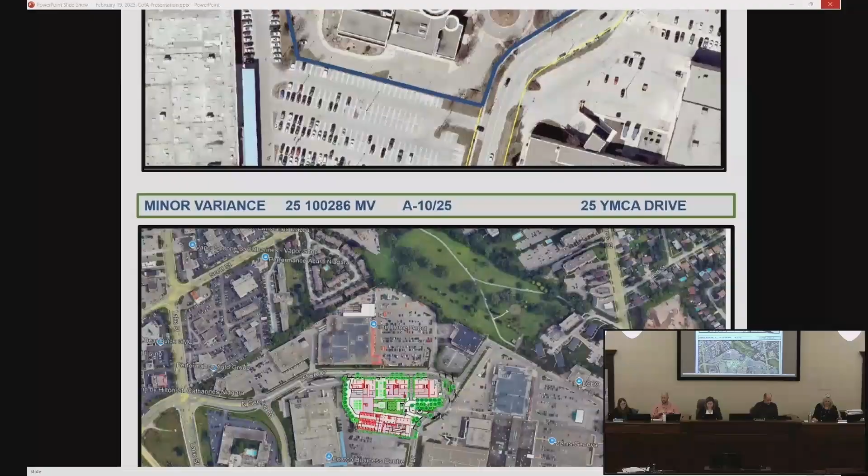This application is for the existing, previous location of the former YMCA building, which has been sold by the YMCA and purchased by a new owner. The new owner is coming to us with respect to a proposal submitted to the city, and that proposal requires some minor variances.

6 variances in particular. So our focus with this committee is these 6 minor variances as they relate to the 4 tests outlined by the Planning Act to determine whether or not we can approve those. We also have a staff report, a technical report, which includes the various departments' comments on the application, and there's a recommendation in that report, which hopefully everyone had a chance to read.

In that report, variance 1 is recommended to be approved with a slight change, outlined in the report. Variances 2, 3, and 4 are proposed by staff to be denied, and variances 5 and 6 are proposed to be approved.

The applicant this evening will have also read this report and will probably be speaking to the staff report with respect to those comments. So at this time, after we hear from the applicant, we will invite anybody in the gallery who wishes to speak to this application to come down. I'll be trying to focus you on these 6 minor variances in particular. The other aspects of this development are beyond our purview. We were given this situation to consider these 6 minor variances.

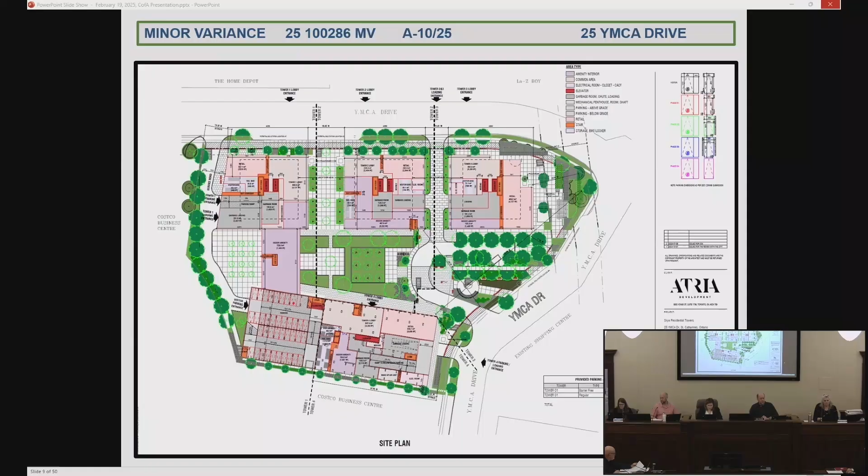So would somebody from the applicant like to say who you guys are and what your comments are regarding the staff report?

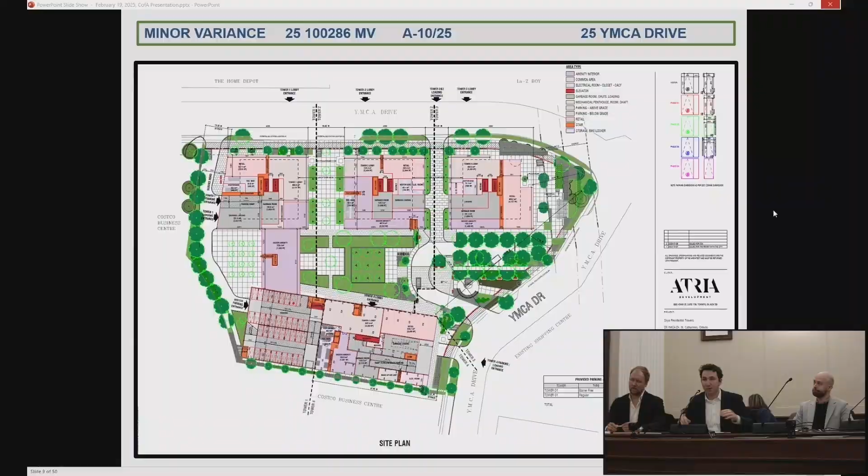Yes, certainly, Mr. Chair, thank you. Good evening, Chair, members of committee, staff, and members of the public who may be in attendance tonight. My name is Ryan Ferrari, I'm a senior planner at A.J. Clarke & Associates. I have my colleague Franz Kloibhofer with me as well, who's a principal planner at A.J. Clarke & Associates. We also have folks from BA Group, Michael and Doug, who are our parking consultants, and you'll hear from them shortly. We also have the owner, VJ, from Atria Developments. So that's our contingent today. We're certainly here to make our case for this application and answer any questions as necessary.

Now, I think the first thing I'd like to note, I provided the committee with a bit of a presentation. I'll just start right on page 2 there.

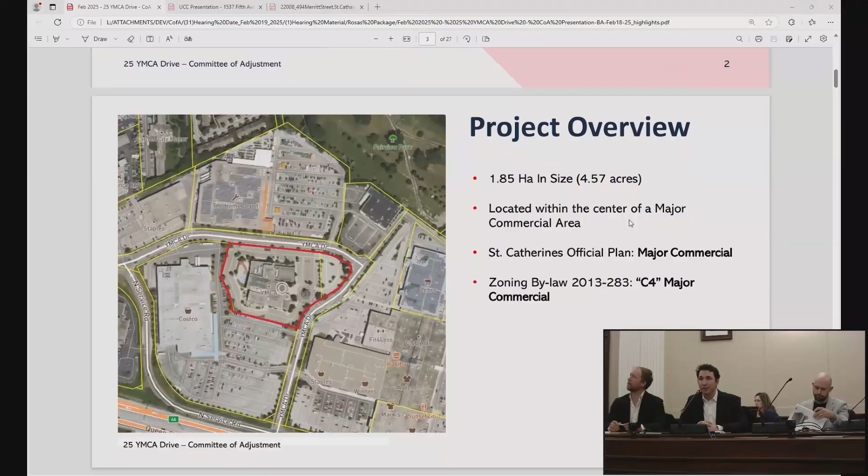Just really quickly, we're going to discuss the proposed variances and staff's recommendations, but first want to touch on the background on slide 3, what's being proposed. This is a 4-tower development located in a major commercial area in the official plan. And as the chair did mention, these 4 towers are permitted in the official plan in terms of height and in terms of the zoning bylaw.

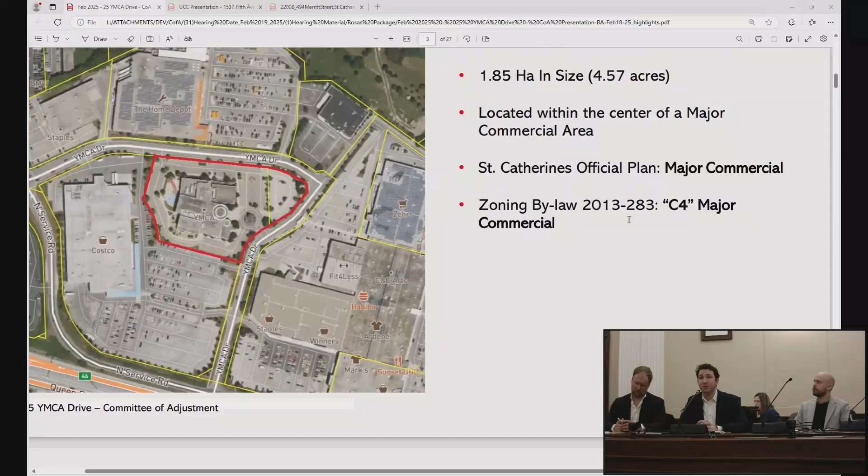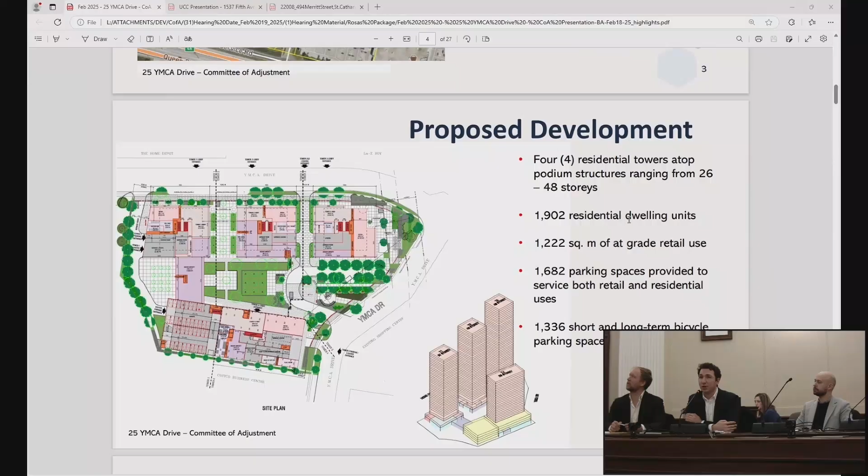These uses are permitted. What we're discussing with the committee today, and what we're asking for, are actually 6 variances, which I put on the next slide, slide number 4. There is ground floor commercial proposed, and 1902 residential units. All this is permitted. In addition, I want to note there's a significant amount of short-term and long-term bicycle parking proposed on this site as well. Next slide, please.

Like I said to the committee, we're requesting 6 variances. Really, what they relate to: 2 relate to bicycle parking and their location, and the other 4 relate to parking in general.

With the next slide, one of the variances we're requesting is for a parking ratio of 0.85 spaces per unit, whereas 1 space is required. The way staff wrote this into their report, which we're in agreement with, is that this will translate into a 0.75 ratio for the residential component and a 0.1 ratio for the visitor component. Staff are supportive of this variance.

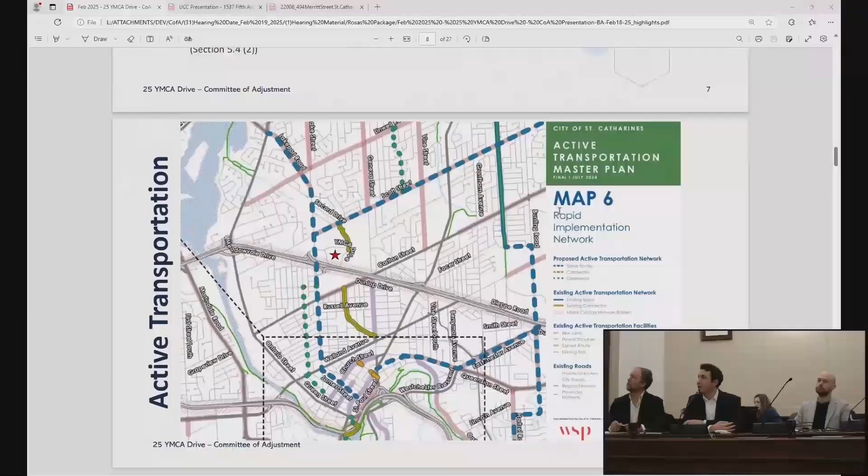Part of the reason why they're supportive, if we go to the next slide, there are policies in the official plan which staff have reviewed in their report, and they concur with our request to reduce the parking for this area because of where it's located. I won't go through the policy details, it's in the staff report, but the next slide shows some of the planned active transportation proposed surrounding the site, showing the cycling network and proposed active transportation network nearby.

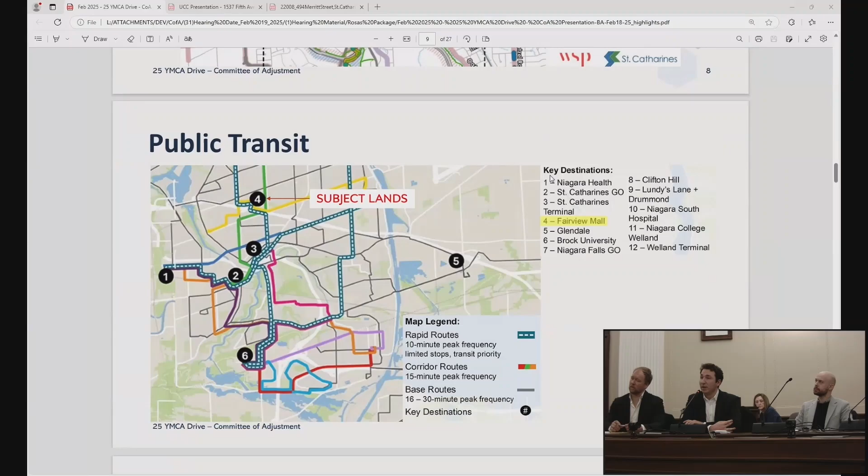The committee should be aware that Niagara Transit is proposing some new plans. What we've highlighted here, number 4, is close to the Fairview Mall site, which is across the street. Those blue and white dotted lines are proposed rapid routes, meaning bus service will be more frequent, every 10 minutes or quicker during rush hour. Adjacent to our site we already have a bus terminal of sorts, and through our site plan application process, we're going to be adding more as well.

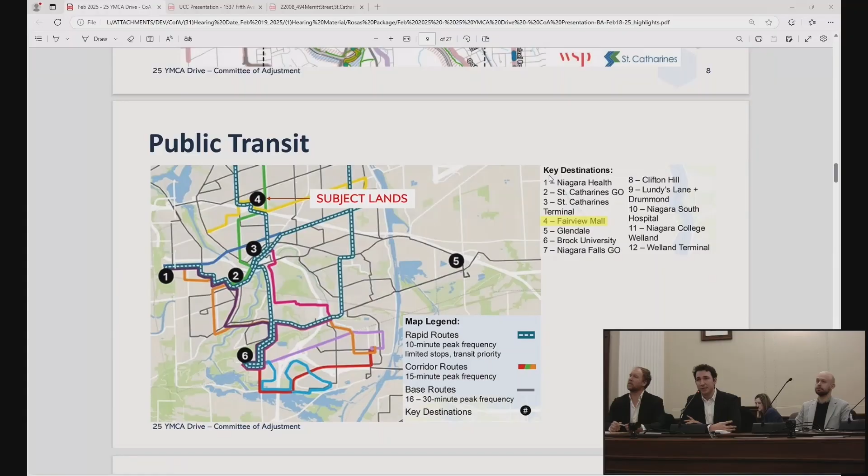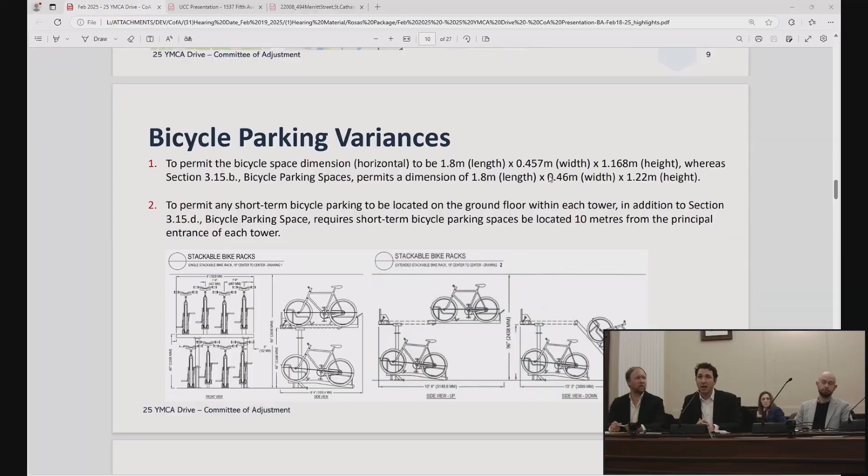So that's the parking variance, and it's the variance that staff support. Really quickly on the next slide, I grouped the bicycle variances together. They just relate to the location of the bicycle parking — we can't locate it all on the ground floor because there are so many spaces. The other relates to the bike parking space, which is an OEM manufacturer type of space, and that's why we need the variance. So those are the variances staff are supportive of, and I'll pass it to Michael and Doug to discuss the parking variances related to our actual parking spaces.

Next slide, please. Hi again, my name is Doug Hall. I'm with BA Group, and we're the parking consultants for the applicant.

I'd like to provide a little background on the request for the parking dimension variances. The original site plan for this site was made in 2021, about 4 years ago. At that time, the parking layout that accompanied that application was based on the then-current zoning bylaw parking requirements, with one exception, having to do with obstructions. The plan dealt with that by creating openings between the columns so that doors weren't obstructed, and I'll talk about that in a minute.

In April of 2024, city staff recommended changes to council to the parking dimensions—3 years after our application had been made—to reduce the width of a drive aisle, increase the width of a parking space, increase the length of a parking space, and bring some criteria to the placement of columns adjacent to parking spaces so they're not obstructed, so people can open their doors.

In the report to council, staff stated that the changes were made in response to formally incorporating a driveway dimension into the zoning bylaw. Previously it had been adjudicated through the site plan process, so they wanted to bring it into the bylaw so it could be adjudicated that way. At the same time, they addressed requests from developers to reduce the width of the drive aisle in order to reduce structural spans, and to compensate for that, they increased the width and length of the parking space.

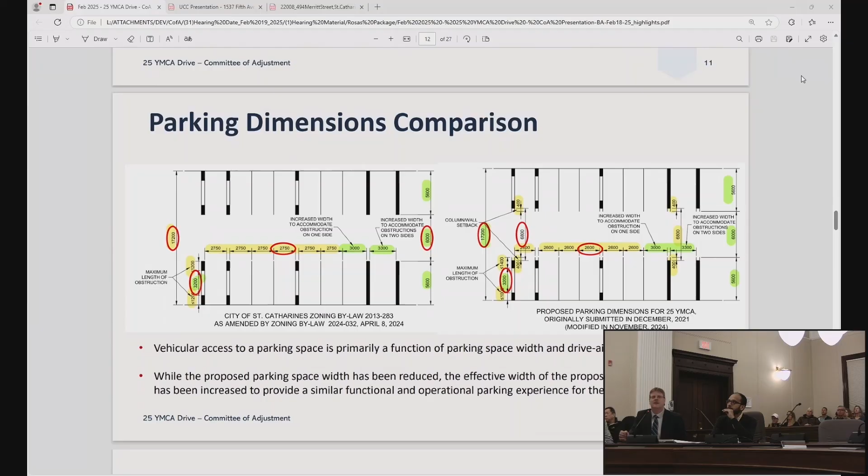Can I go to the next slide, please? Oh boy, that's going to be hard for a lot of people to see. I hope you can see that on your screen. Oh, thanks. This slide shows a comparison of the current zoning bylaw condition on the left and the proposed condition on the right, with the same parking layout.

It's hard to tell green and yellow on that slide, but the key differences are the width of the drive aisle, which is 6 meters in the current zoning bylaw condition. We've increased it to 6.8. The ability for a car to park in a parking space is determined primarily by a couple of things: the width of the drive aisle that the vehicle is turning from, and the width of the parking space that the vehicle is driving into or backing into. They work together—drive aisle width and parking space width work together.

So the current zoning bylaw condition has a narrower drive aisle and a wider parking space. We're proposing a wider drive aisle with the previous parking space width of 2.6 meters—so from 2.75 to 2.6—but the drive aisle goes from 6 meters to 6.8 because we're able to push the columns back. The architects have confirmed that the structural issues are not a problem in this case with making that span work. So effectively we've created a parking situation that is, in our opinion, equivalent.

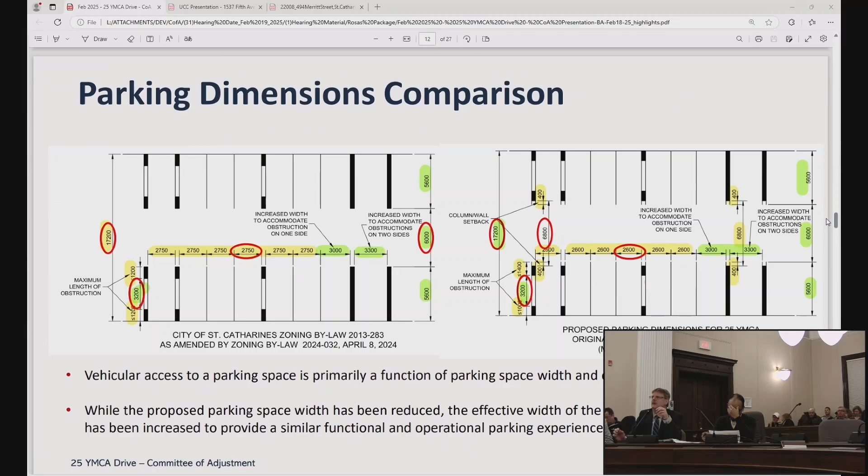One key component that's the same in both conditions is the width between the front column, adjacent to the drive aisle, and the column adjacent to the back of the stall. That opening of 3.2 meters is exactly the same in the zoning bylaw requirement and in our proposed requirement. We want it to be the same because we want people to be able to open their doors, obviously. Next slide, please.

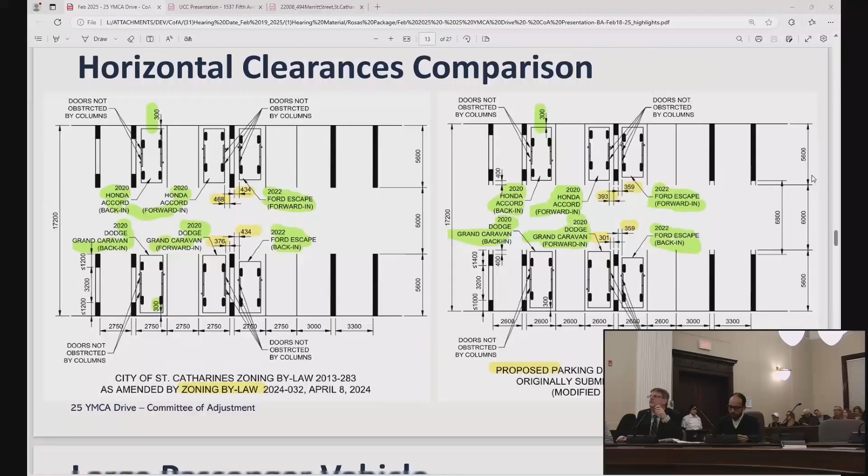The next series of diagrams are what we call vehicle maneuver diagrams. They are computer simulations of the turning movements of a vehicle, but based on field surveys we do. We actually take these vehicles out, turn them around, measure their turning diameters and turning radii, and then create these simulated diagrams, really just for comparison purposes.

We're always going with the bigger vehicle, the Dodge Caravan, in these diagrams. In the one on the left, the zoning bylaw parking requirements, the vehicle driving in makes a correction: it turns towards the parking space, backs up, and then drives in. Same thing in the proposed condition, so the effect of the driving condition is the same for the driver.

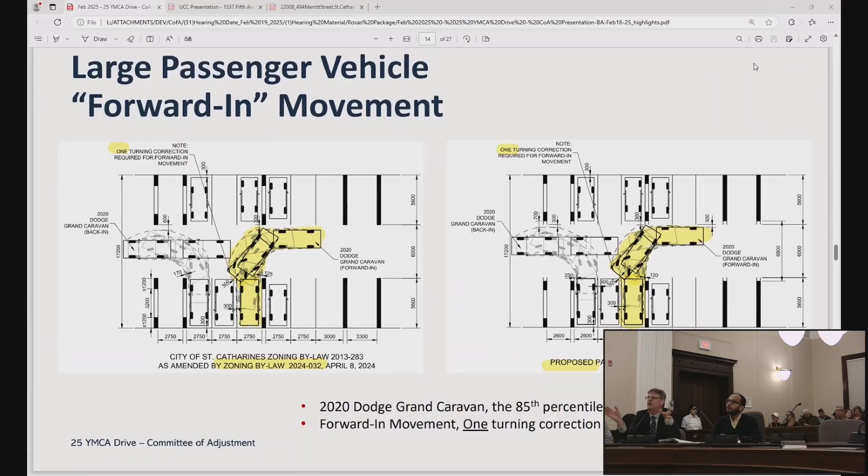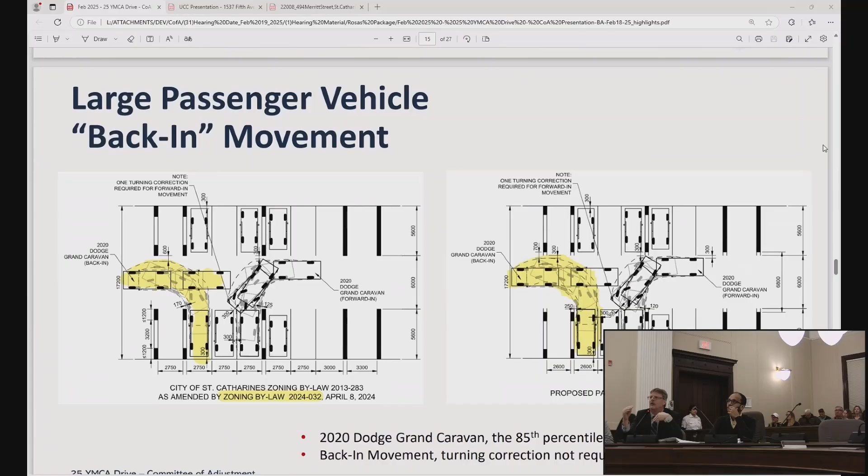This is the same vehicle, but it's backing in now. Many people find that if you drive a larger vehicle, you'll often see people back into their parking space because it's easier to do. Most of the maneuvering area, the swing, is out in the drive aisle where you've got lots of room, and you're backing in straight into the parking space, which is narrower. The condition in the zoning bylaw and the proposed condition is exactly the same in terms of the driver's ability to make that turn. In fact, it might be a little easier in the proposed condition because we've set the columns back from the edge of the drive aisle, so there's less obstruction for the vehicle while it's turning.

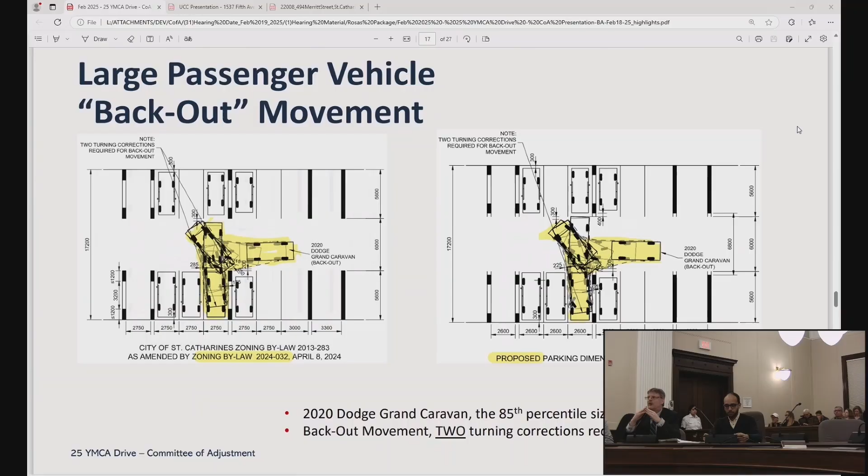Looking at plans with vehicles on them is fun, but real life is always interesting too. So the next few slides are shots of vehicles parked in a real underground parking garage with the same parking dimensions that we're proposing.

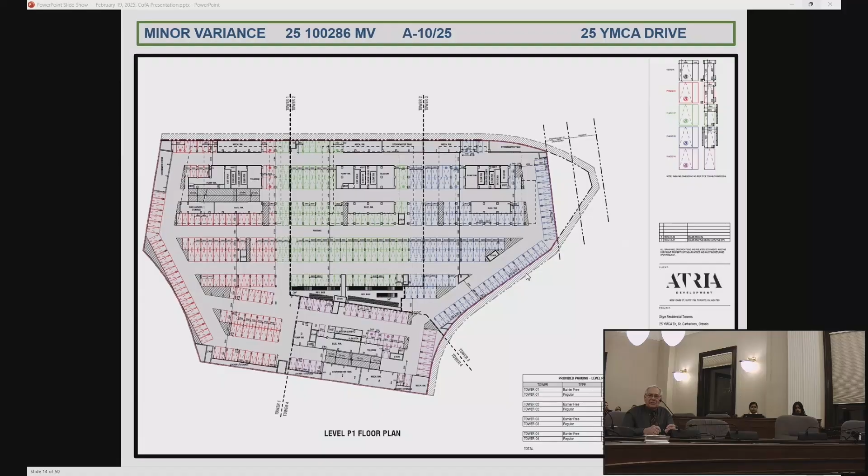We've got the shipyards, and I'm familiar with that, we've got friends that live there and everything else. But now we've got to be very careful of the type of batteries that are in these new vehicles, and they're underground. The garage isn't high enough for fire engines, and you have to have special spray to put the fires out and all that.

Again, I'm sorry, I'm going to have to interrupt you because the life safety of any building—I'm an architect, I have to deal with this. The life safety requirements for the design team to provide adequate fire suppression and life safety measures come at the building department, building permit application phase. This is simply, we don't care if it's made of Swiss cheese at this point, we just care about how the residents feel about the parking reduction and bicycles, although no one seems to care about poor old bicycles.

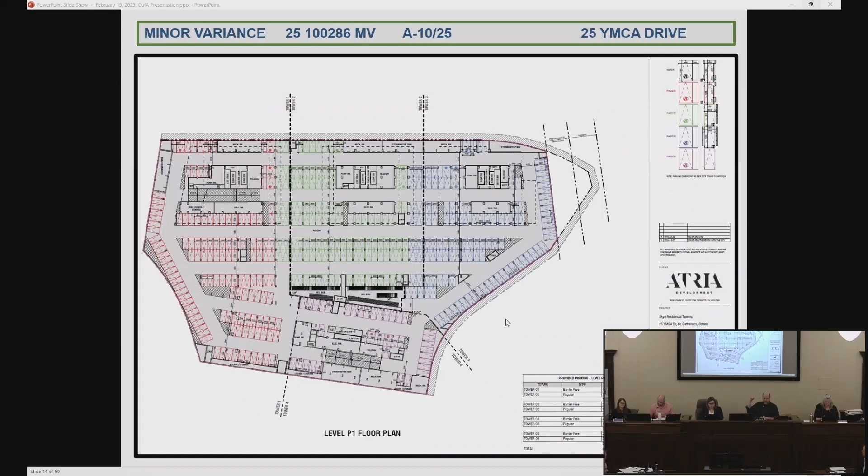And the applicant's going to be bothered by the fact that the city wants to recommend denial for their parking stall reductions, which is why they spent so long trying to prove to us through those turning radii diagrams—which did not include an F-150, just showed it in the picture—that they should be entitled to approval of what the city is denying. So right now, nobody is happy with the staff report in terms of not getting what they want. So the safety of the parking garage is someone else's concern at a later date. It is not a concern for this minor variance application.

Mr. Chair, I would like to be very clear on that point. Sir, I'll be very clear: we will meet all requirements of the provisions for firefighting in the building code. We will be held to that task by the city.

Okay, and then the other thing is, our city isn't Toronto—we don't have a lot of high buildings. Respectfully, you've got... you're in Ontario. Right, and you are subject to the Ontario building code.

In terms of St. Catharines, we have Towering Heights Boulevard off of Glendale Avenue, where there are a number of what we might consider mid-rise or tall buildings in St. Catharines. But there's a way to accommodate this building type, and St. Catharines is looking at ways to increase intensification and density as per the Planning Act. This is a vehicle through which to do it—to stack people on top of one another rather than spread out and extend our resources to the brink.

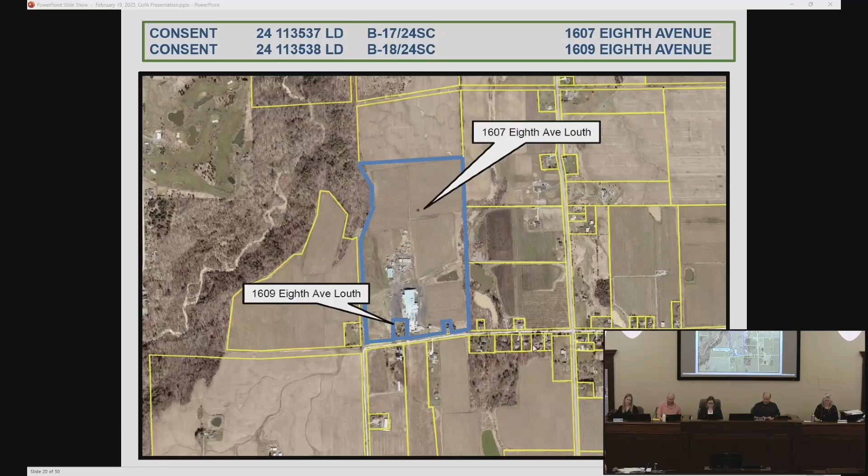However, I'll do a better job in this application, because we are now going to go to our second application at 1607 8th Avenue Louth for 2 consent applications. This is to divide up some agricultural rural property, and I would invite the applicant to state their name and address and offer anything they want in support of their application.

Yeah, it's the one, it's the little red light. Red one? Okay. My name's Tim Kenny, 14 McCartney Court, Thorold, Ontario.

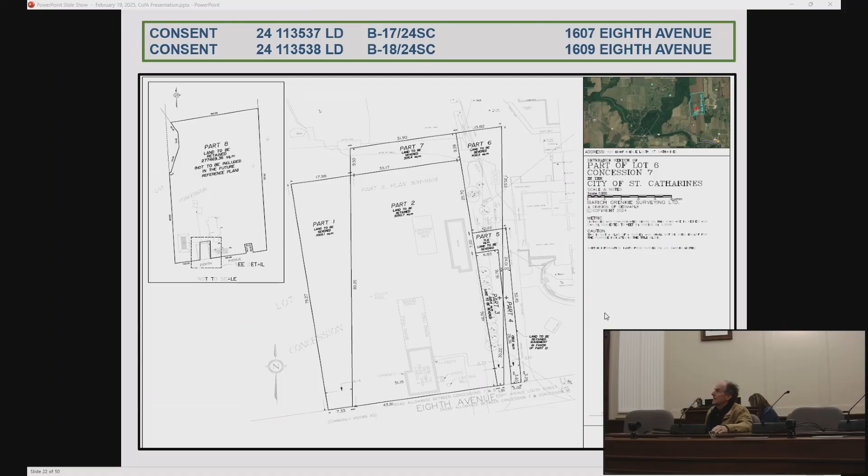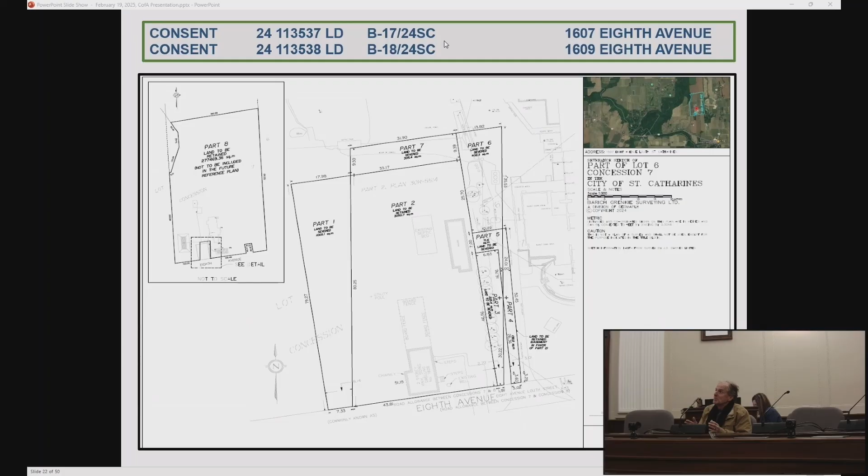I'm here representing both Hernder Estates Winery and my brother John Kenny, who lives at 1609 8th Avenue. I'll keep it brief. We agree with staff's recommendation. It's really not a severance of a piece of farmland, it's more of a lot line adjustment. We all know Hernder Estates Winery had an awful fire that destroyed their operation. When they went to rebuild, they found some existing services were encroaching onto my brother's land at 1609 8th Avenue. So what we've attempted to do is a lot line adjustment, swapping an equal amount of land to accommodate the existing services at Hernder Estates. As a result, some of their services will be on their own land as opposed to encroaching on my brother's property. Okay, thanks so much.

Any questions from the members of the committee? Is there anybody in the gallery who wishes to speak to this application for severances or lot line adjustment at 1607 8th Avenue, Louth? Nope, great. Would a member of the committee like to make a motion, please?

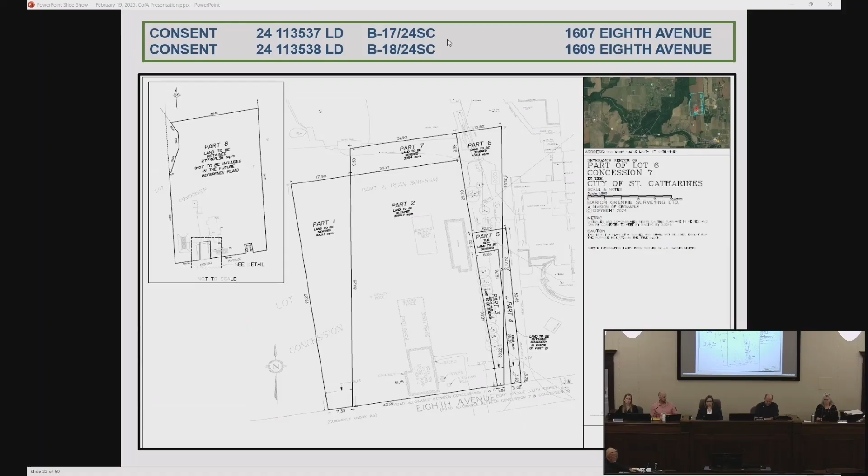Sure. Following consideration of all written and oral presentations, I move that consent applications B1724SC and B1824SC as presented in the notice of hearing be approved, subject to the conditions outlined in the technical report, as the consents are desirable and compatible with the surrounding area, have no adverse impacts on the surrounding properties, have regard to the provisions of Section 51(24) of the Planning Act, conform with the policies of the city's official plan, and with the conditions fulfilled also comply with the zoning bylaw. They maintain the intent and purpose of the provincial planning statement, and they do not conflict with any applicable provincial plans. Thank you.

All those in favor of the motion? Congratulations, your application has been approved unanimously. Thank you, Mr. Chairman, members.

Now we are going to move over to 1537 5th Avenue, Louth, for a consent application. Yeah, right.

If we can have your particulars, name, address, and comments in support of your application or anything you may have read in the staff report. Sure, thank you, Mr. Chair. I do have a presentation.

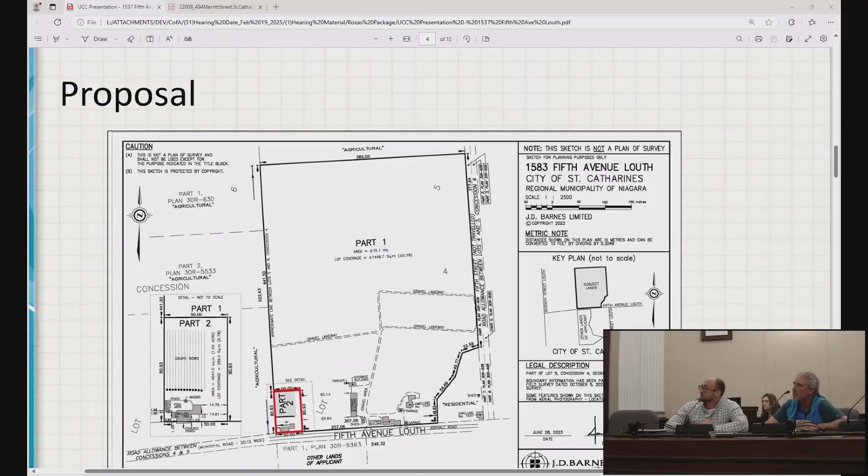So now I want to take a step back and explore what a surplus severance actually is. A surplus severance is defined in the provincial planning statement as one existing habitable detached dwelling, including any associated additional residential units, that are rendered surplus as a result of farm consolidation, the acquisition of additional farm parcels to be operated as one farm operation.

Surplus severances are a unique policy tool because in most cases, provincial policy discourages lot creation or any form of land fragmentation in agricultural areas. However, surplus severances are permitted because they remove barriers to farm consolidation, which supports the agricultural sector by creating larger, and therefore more economically viable, farms.

So why is this important? Additional dwellings can be a financial and maintenance burden for farmers, making consolidation more difficult. By allowing surplus dwellings to be severed, farmers can avoid the cost of purchasing and maintaining unnecessary homes. This frees up capital to invest directly into the farm and prevents farmers from having to take on the added responsibility of being landlords, allowing them to focus on farming instead of managing residential properties.

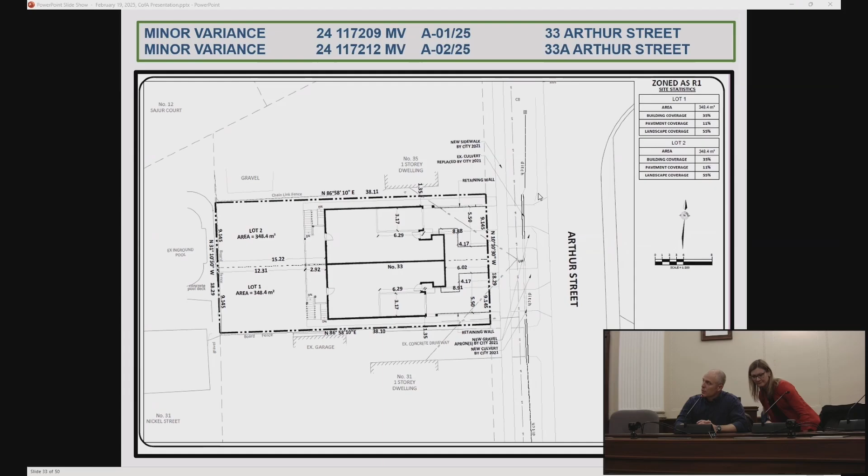So if the applicant could clarify anything they wanted to with their application, give us your name and address, please. Thank you, Mr. Chair. My name is Mark Eitzen. I reside at 6 Crown Street in the North End. This is my wife, Wendy, and we're co-applicants with Mr. Ben Lockyer. He owns the right side of the building, which is 33A.

So we're here to discuss, regrettably, the parking issue that's already been before the committee today, just in a slightly different light. The parking issue is becoming a bigger challenge for the city all the time, and it's not visible in the picture, but we have a legal auxiliary dwelling unit in the basement of both 33 and 33A Arthur. So we've invested significant time, effort, and resources into building a legal dwelling within the city that's in compliance with all the current building codes.

And we're also local residents, we're homeowners, we live 5 minutes away from our investment property. So we disagree with the staff report in the sense that we believe that our request is in fact minor in nature. At the time that we built these properties and completed the driveways pre-April 2024, the zoning amendment at that time allowed for a driveway width of 50% of the front lot, equaling 4.6 meters. We're asking for 5.5 now.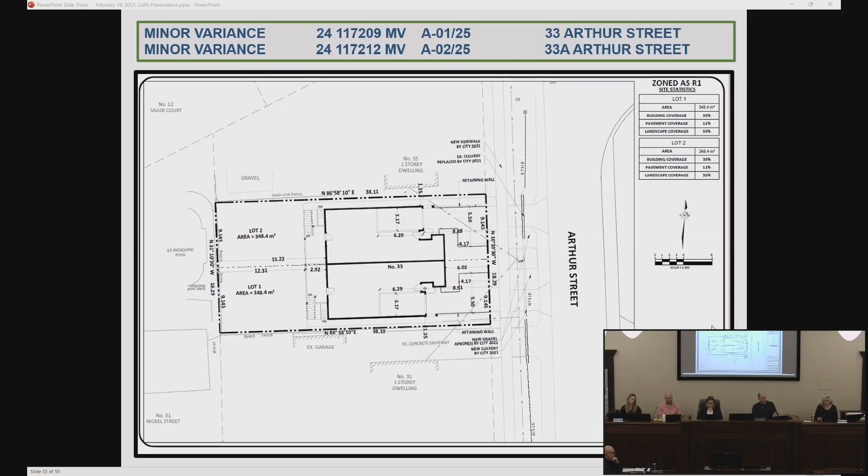In a sense, you're correct. We're not denying at all that we are in violation of the bylaw. I didn't get into the entire background, but there are issues with the original plan and the house being built in the wrong spot geographically on the land. It was actually supposed to be set further back, so parking would have been an easier issue. There are probably records within the city of that having been adjusted, and I believe there was an amendment made at that time. Ultimately, we were just trying to mitigate the circumstances of tenants having to cross the street. But I recognize, I don't dispute your point.

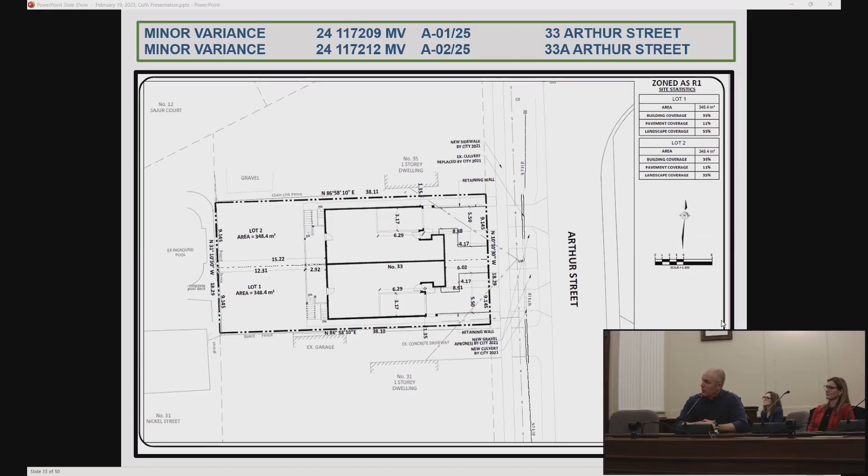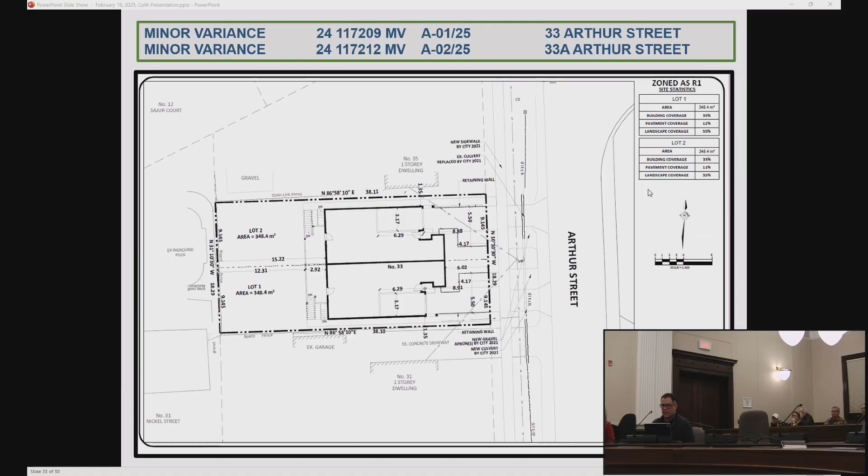As a local real estate professional, I have the privilege of being in these types of properties on a daily basis. Today I've been in 6 properties, and 2 of them had basement units, because over my involvement over the last 15 years, the growing trend has been to add these accessory dwelling units. It's rare to go on one of these tours now and not go into a basement that has an additional kitchen with people living in it. But I can only count on one hand the number of times these properties, even though I'm in them daily, have been done legally or have the permit in order to do so.

As a partner with the city who has now built 3 of these, we do want to be part of the housing solution and not part of the problem. But your practical consideration is requested. We know there are now financial incentives to grant and create what we've done on our own, highlighting the desperate need for additional housing and pushing that. Things are changing, except with regards to the parking. Our request to the committee is to consider this both from a practical perspective, but also, as Mark laid out, from a safety perspective as well.

How can we grant permission to these additional dwelling units while not considering the need for tenants to actually park side by side? The front-back parking solutions with a garage and an adjacent parking do not meet the needs of any living conditions when you build these accessory dwelling units. People will not be knocking on doors to their tenant upstairs to ask them to move their car so they can get out of the driveway they've been parking on. It's just not practical, even from an interpersonal perspective. We believe the common sense approach, if we're going to make concessions for accessory dwelling units, needs to consider this additional parking as well.

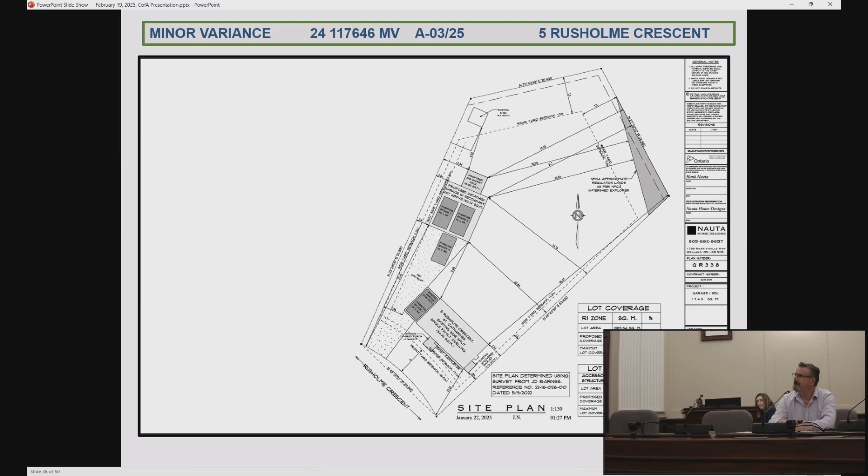All those in favor? Great, your application's been approved unanimously. With the, here we go. Your applications for variances 1 and 2 have been approved, 3 has been removed. Thank you. Thank you, Mr. Chair.

Okay, so let's keep the momentum going here and find ourselves at 29 Johnston Street.

Okay, so welcome. We have a consent and minor variance application. This is to facilitate construction of a proposed 2-story detached dwelling. So we have the staff report, which has a number of conditions related to the consent, 11 in total, and staff recommendation for approval of the minor variance.

So you can state your name and address and share with us your thoughts on your application. Appreciate it. Good evening, Mr. Chair, and all members of the committee. First of all, thank you for all the recommendations, we just have some comments on it. I'm representing 29 Johnston Street on behalf of the client. We've been working on the design of their house for a while, and that becomes, as you mentioned, the consent.

A couple of minor variances for part 1 of the lot. Basically, we only have a couple of concerns regarding points number 4, 5 and 6, which require the construction of a 1.5 meter sidewalk on the property along Johnston Street. We noticed that on the same street, Johnston and Bayview, there's a severed lot already, and it doesn't have this condition, being also an existing corner house. We just wonder if we can move that fee until the project is actually going to be built.

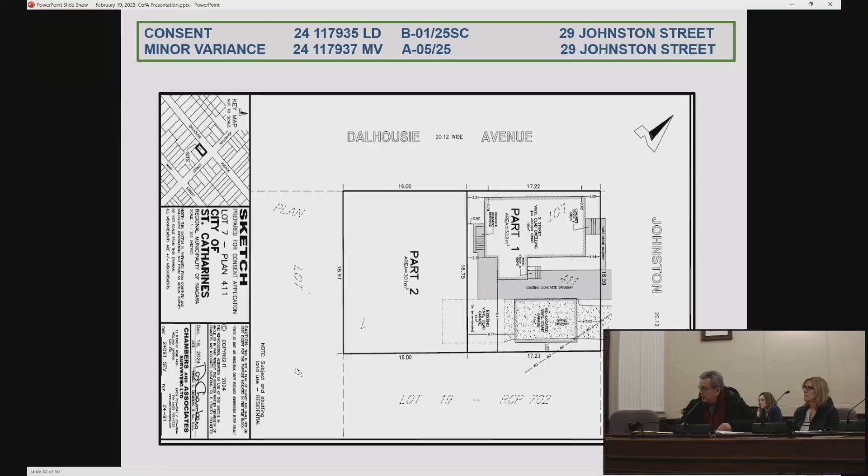The second point we want to request a waiver on is the requirement for the stormwater management report. As this is an existing condition, it's already draining to Johnston Street, and we can provide all the calculations the planner is requesting to make sure it's under the 45%, so we don't have to go through that hassle being an existing house that's already draining properly into the street.

So again, this is one of these things of measuring - does staff have a comment regarding the applicant contesting condition number 5?

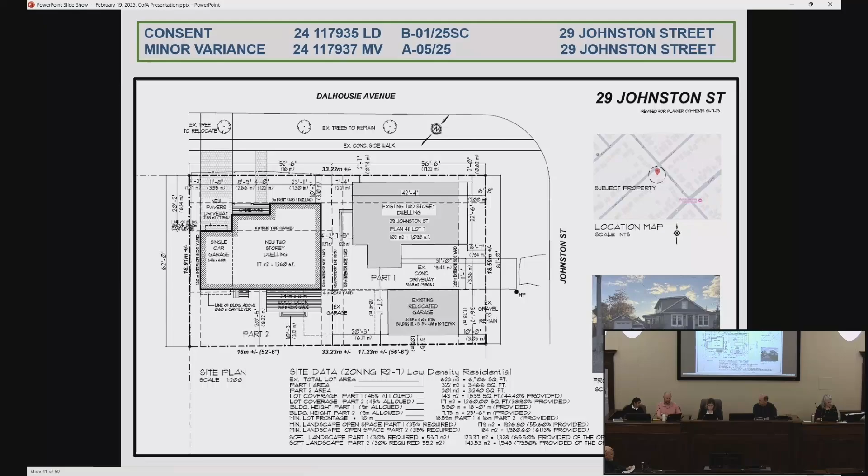Through the chair, to the applicant: regarding the requirement for the stormwater management report, this is a requirement from the development engineer to confirm that the new lot creation would be adhering to the stormwater drain and drainage accommodations for the new lot created through the consent. So this is again a standard requirement for lot creation for consent applications.

Basically, they want documentation that can demonstrate that surface drainage flows are not going onto other properties or even onto the severed property. So this is an attempt at documenting what's actually happening on the site and confirming there's no adverse effects on either of the adjacent lots.

There's a comment anyway. We will consider your request in our motion to remove these, but I'm just providing you with reasons and explanations as to why they're there. So, your next comment? Thank you, Mr. Chair.

And the last one would be regarding number 6, about the servicing and grading for the existing lot. As pointed out, the above is required when the setback variances involve a building or construction being less than 0.61. As we can compare with the survey, it says 0.62. So we understand we have to provide it for the new dwelling, but for the existing one, probably we can also have a waiver.

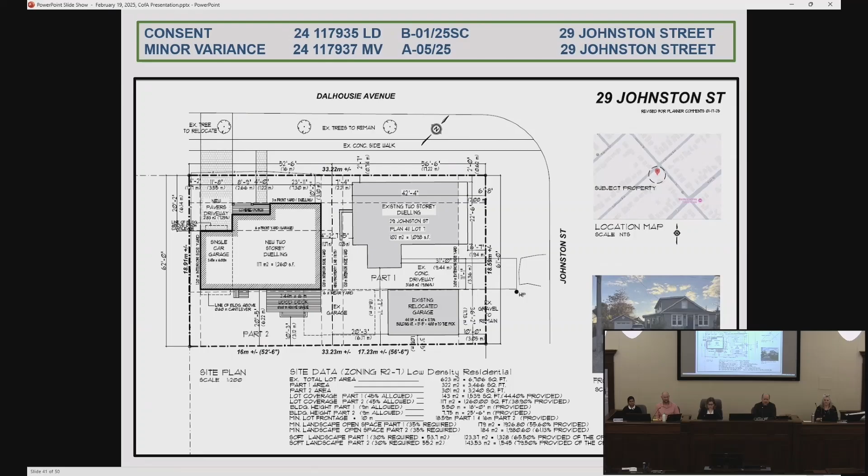Hi, my name's Mark Rainin. I live at 31 Johnston Street, just across the corner. I also work in the building industry, so I think the intensification of this property is ideal, and obviously it meets the requirements. A couple things as I read through the multiple pages on the property.

Item 4, the sidewalk - I've lived on that property for 21 years, so there is no sidewalk from Johnston to Bayview. You could say there's a sidewalk on a portion of Main Street to Dalhousie, however there's a vacant property that's basically overgrown. The rest of the sidewalk is maybe a meter - it's the original sidewalk.

$7,000, I think, was the number for that piece of sidewalk. Realistically, you're going to ask people to do that when the sidewalk is never going to be completed on the rest of the street.

But you understand that there is an attempt to provide a walkable, safe environment in these communities. There is a sidewalk on the other side of the street, correct? Right, and usually we see them on both sides of the street to the benefit of everybody living on each side. Anyway, that was the rationale given to the applicant.

So we have a declared conflict of interest for one of our committee members, so you have two of us to talk to, which is, yes, we can. If it's 50-50, it gets ugly, but we'll see what happens. All right, thank you, Carrie.

This is a minor variance application for 494 Merritt Street. This is for a proposed 4-story mixed-use building consisting of commercial units and 12 residential units. So if the applicant would like to tell us more about what's going on, we'd be happy to hear, and who you are and where you're from.

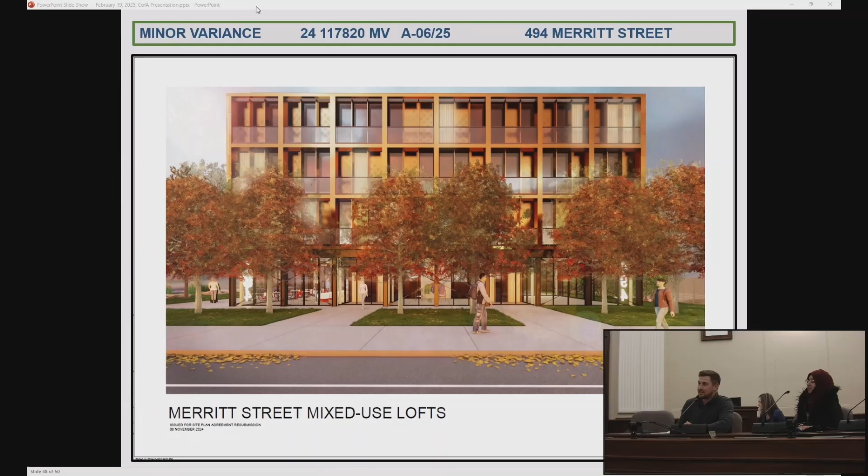Hello, Matthew Trindota from Quartek Group. Quartek Group is here in St. Catharines, and I also reside here in St. Catharines. I'm also an architect from Quartek Group who will be speaking to the file, accompanied by my colleague Zabima, who is a junior planner.

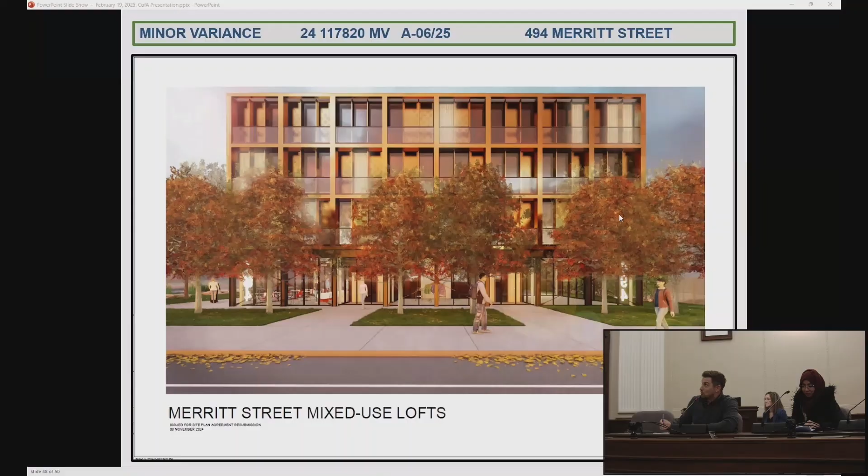We prepared a brief slideshow just to go over the application. We have already submitted for a site plan agreement and received conditional approval, and we're seeking 3 minor variances on 3 small items that we require to get the approval.

The property is located at 494 Merritt Street. We can move to the next slide.

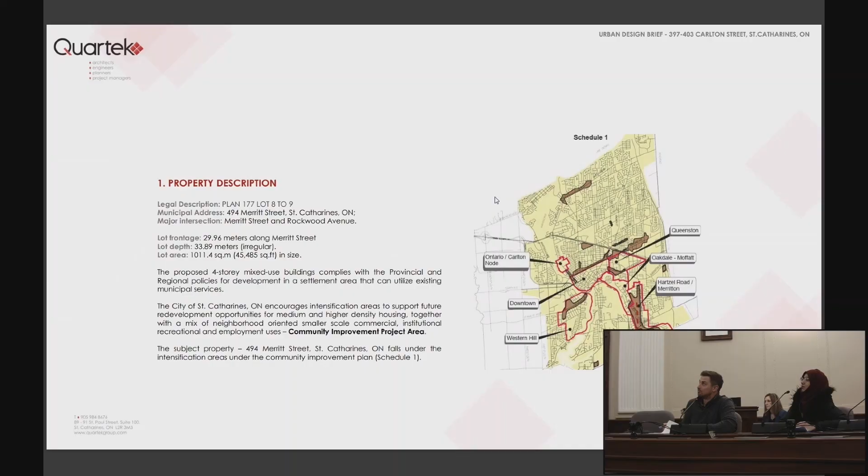The site plan proposal is for 12 residential units. Each of the residential units is a 2-bedroom suite. On the main floor, there are 3 commercial suites with parking in the back. The commercial suites front onto Merritt Street, and there is some landscaping in front of the development, which is included in the development and paid for by the developer.

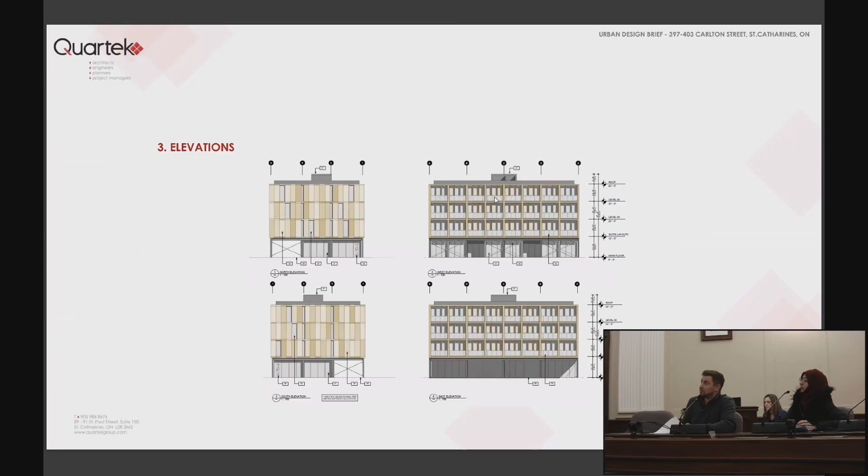Next slide, please. These are the elevations of the building from the front and from the side. Next slide, please. And 3D perspectives.

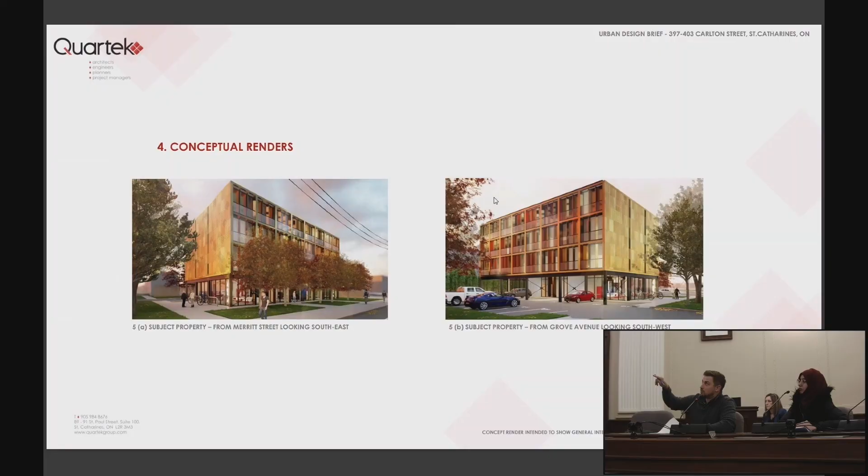The perspective on the left side shows the view from Merritt Street of the commercial space and the little parkette at the corner there. The rendering on the right side shows how the parking area is tucked in behind the building, out of sight from Merritt Street. Some of the parking stalls are tucked underneath the building to help meet the parking requirements. Next slide, please.

We're asking for 3 minor variances. The first minor variance is in regards to the density. There was a road widening which took some lands away from the property, so the density used to comply at 12 residential units, and now it's non-compliant because only 11 residential units are permitted. So we're requesting a minor variance to change the density per hectare to get that 12th unit back, which mathematically was subtracted from us due to the smaller lot area after the road widening.

I noticed that staff made a recommendation to amend what we've been asking for. We've been asking for 118 units per hectare, whereas staff amended it to 119 units per hectare, and that's just from a rounding error, so we do appreciate 119 units per hectare is the correct way forward, and that's what we're requesting.

The second variance that we're asking for is a reduction of 1 parking stall total. That's not for the residential suites, that's being subtracted from the commercial suites. We're required to have 1 parking stall per 20 square meters of commercial space, and we're requesting that be relaxed to 1 parking stall per 22.5 square meters. Not a big ask, it's all a numbers game. So the net is one parking stall that we're asking to be relaxed.

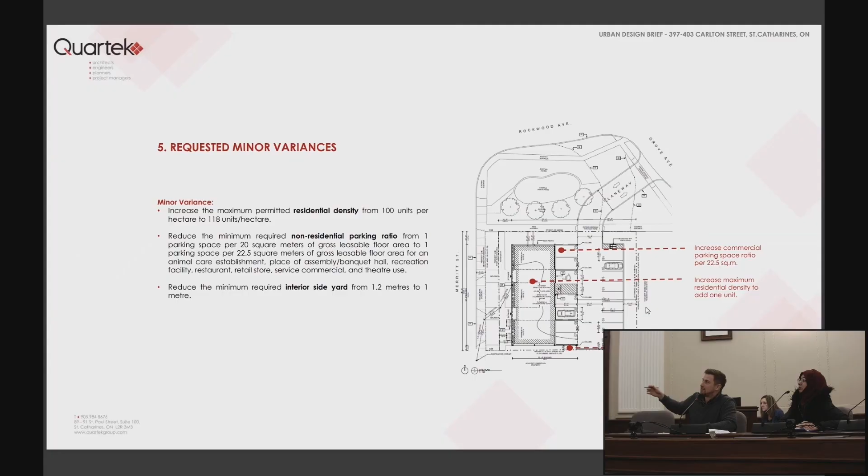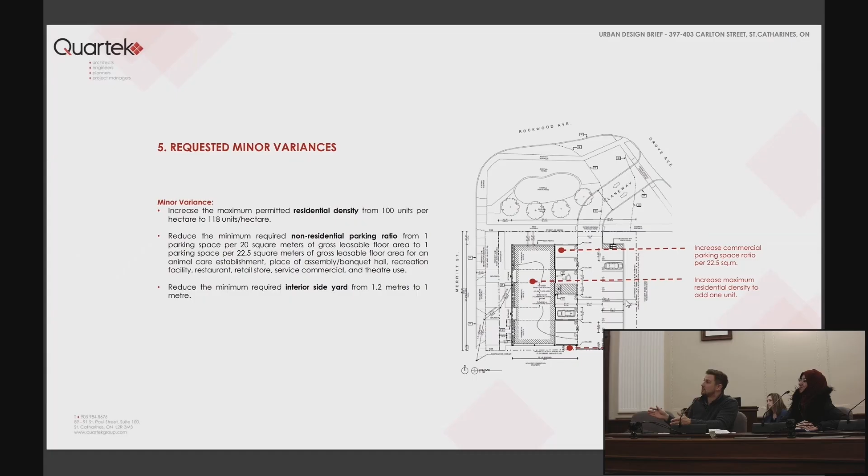So you just couldn't find those 20 centimeters? Well, it's a numbers game, and it has to do with the parking. To get all the required widths between the columns, we couldn't actually.

With that being said, I'll turn it over to city staff and the Committee of Adjustment if they have any questions.

Great, thanks so much. Do you have any questions? I don't have any questions. Does anybody out there have any questions? Because why would you be here otherwise? Well, you know, you drew the last file.

Okay, so name, address, and comments regarding this application with respect to the 3 minor variances being requested. Nina Davidson is my name, and I live at 23 Balsam, the property directly behind this one.

My main concern is the parking. I see that you've got 15 parking spaces and 1 handicap spot, but with 3 commercial units going in downstairs, where's everybody else going to park? Our neighborhood is completely congested with street parking already as it is.

So you're right, they are here for a 1 parking stall reduction, and they have allocated, specifically that reduction is coming from the requirement for the commercial parking requirements. So perhaps if there's a clever answer from the applicant as to what other options are for people who might be visiting this building in the future for its commercial offerings, you're welcome to provide an answer. Otherwise, we can hear out the rest of the comments.

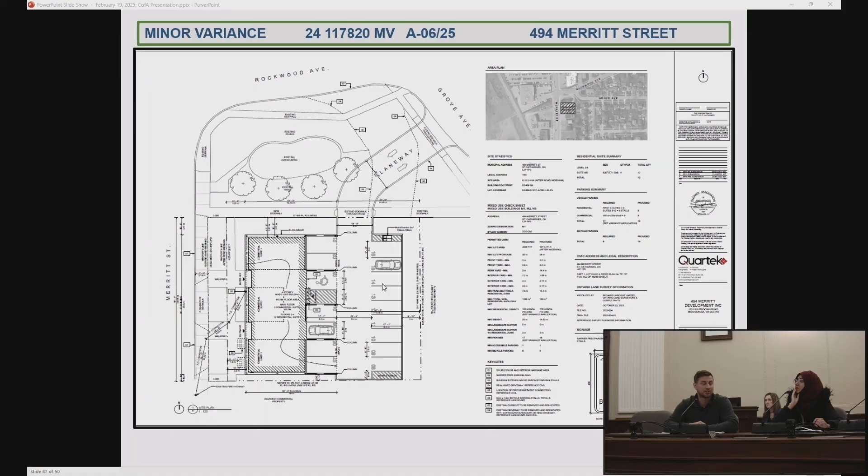The city had requested that we realign it to make that intersection more safe. So in working with city staff, this was an agreed upon preferred solution? That is correct. As a resident who observes this corner all the time, you might have a different 24-hour observation about what safety is, but...

Since you weren't available to consult at the time of the design, the applicant and the city had the city as their best resource, so hopefully the expectations of this improving situation pan out. But you did point out an issue that was reviewed during the design process, and this is the best they came up with.

Well, I wish they'd come up with something a whole lot better. Safety is my concern. I've driven three and a half decades with CAA, so... What's it with you and decades? I like decades, I think. We should still measure our age in weeks, like little babies.

So you're concerned about the driveway access to Grove because there's a pinch point, a convergence of roads. Is there anything else about this application that you have concerns about?

Just reiterating Nina's point about parking. There are two cars—well, right now a guy from the USA parks basically in our area, and I've warned him to be careful because the garbage trucks only come around that corner on Wednesdays and they've narrowly clipped his car. A lot of times cars park in front of my house and across the street too, and people trying to get through there do it very quickly.

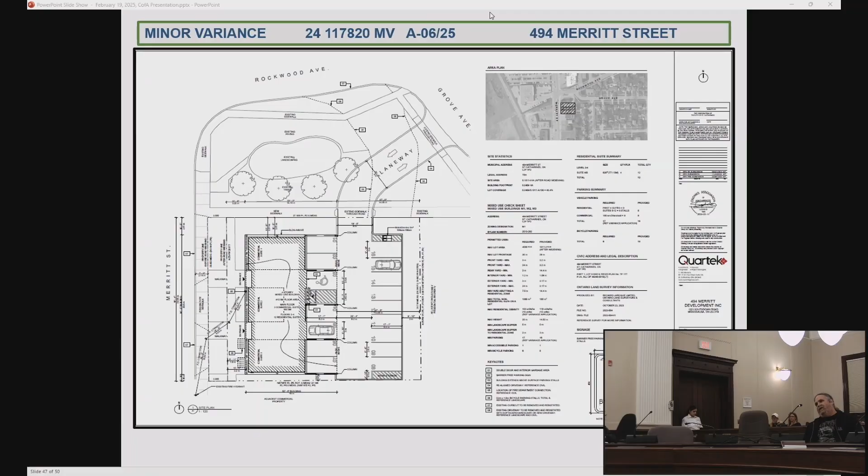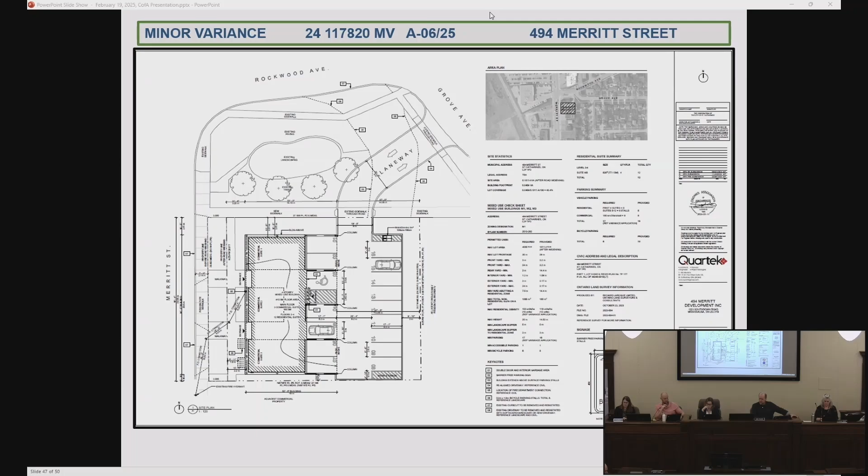I'd suggest one option, aside from this application: as a resident observing these conditions, call the city traffic department and let them know, and hopefully there's a response with traffic calming measures. With respect to this application, a development working within its property lines can't fix an infrastructure problem outside those lines, but they are supposed to be responsive—please give them a call again. Is there anything else you wish to add?

In response to calling City Hall—be gentle. I had a guy doing 80 kilometers an hour on wheelies down Grove Avenue at about 9 o'clock at night when it was dark, and when I called the police to report him, they said, 'Why don't you go out there and take care of it yourself?' Hey, I wasn't doing 80, I was only 75. So I'm just saying, calling doesn't always help.

I understand, I too am a citizen who likes to get the attention of people, but persistence will pay off, I guarantee it. Thanks so much.

Anybody else wanting to get their five minutes of fame and speak to this application, having waited so long? No? Going once, twice, gone. Great, thanks. Any follow-up comments? No? Great. Thank you.

Do we have a motion? Following consideration of all written and oral presentation, I move that variance application A-06/25, as presented in the notice of hearing, be approved, as the variance is minor in nature, appropriate, and desirable for the use of the land, and is in keeping with the general intent and purpose of the official plan and zoning bylaw.